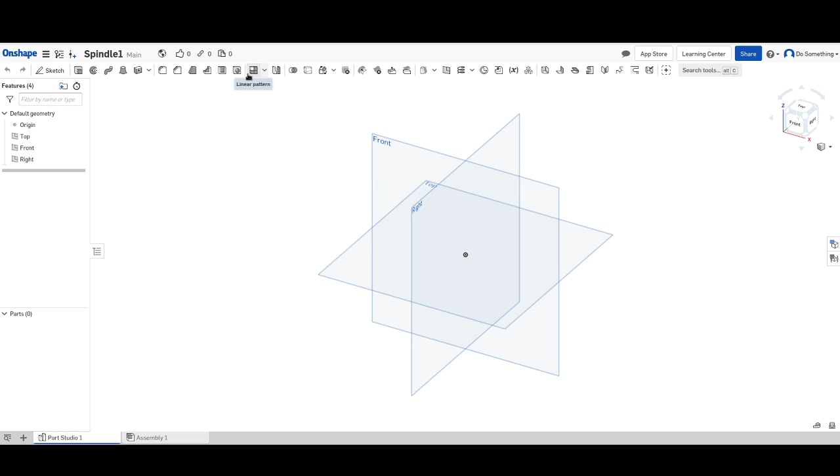Okay, so what I'm doing today is building the spindle for the wires for my curtain robot. I'm doing that in OnShape, which is a free CAD-like tool for designing things that can be 3D printed. OnShape isn't always free, but you can create a free account—the only restriction is that all your designs are public, which is fine since this is on YouTube. I've created a new document and called it Spindle 1. This is going to be a learning experience as we go, since I don't really know how to use this. I had one tutorial from a friend a couple months ago, so we're gonna see how this goes.

So I'm gonna start by making a sketch. Sketch plane will be this plane. Can I hide the axes? How do I hide the axes? I'm sure it can be done. Hide all planes. Boom, okay.

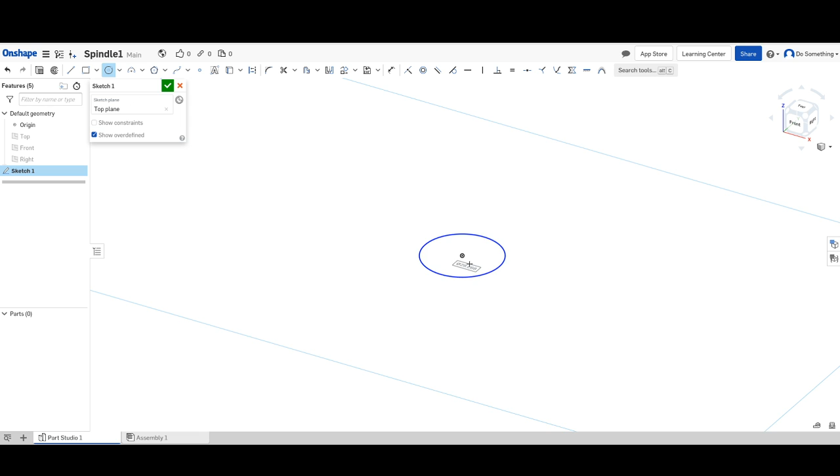All right, so we're going to start by making some concentric circles. Let's double check that our units are correct—workspace units, millimeter. Great. So in sketch 1, I know that the axle, the rod on my stepper motor, has a diameter of 5 millimeters at its roundest point, and it has a cutoff plane where the diameter is 4.5 millimeters. So we're going to start by making, right at the center, a 5 millimeter circle. That's way more than 5 millimeters.

Oops. 5 millimeters. Boom, there it goes, teeny tiny. Okay.

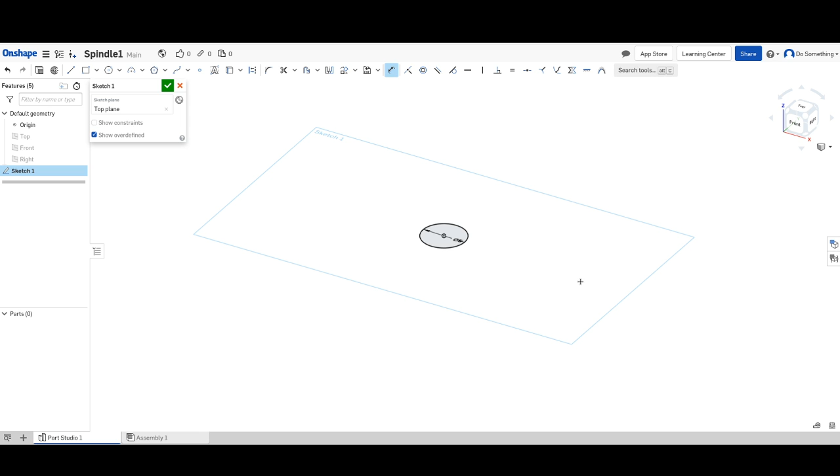Now we're going to make a dot, and stick the dot on the circumference of the circle. We're going to make a straight line, and I'm going to pull that across. OnShape does a bunch of really nice auto fittings, so I know this line is parallel to the diameter of the circle, because OnShape makes sure that it is, which is really nice. I'm gonna make sure the dimension between this guy and this guy is what I want it to be, which is 4.5 millimeters.

All right, so that has created the hole. So far we don't have the hole in anything, but that has created the hole through which the rod of the motor will go.

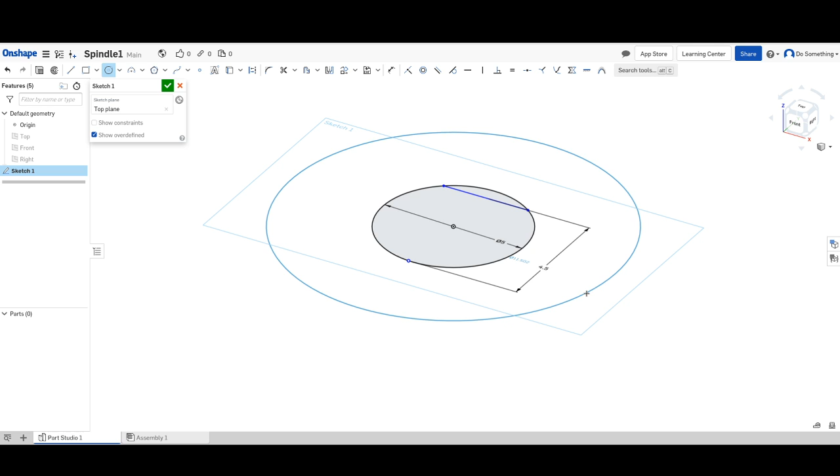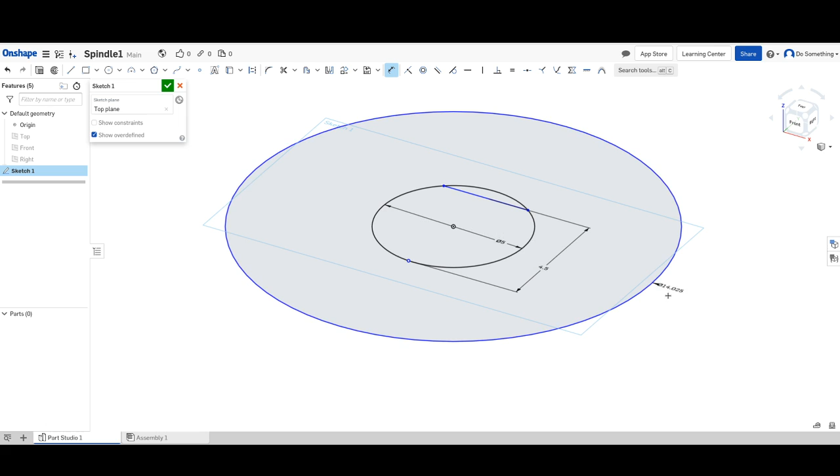Now we're going to create a circle that will be the first kind of boundary of the spindle. I think this is 0.5 centimeter in diameter. So get another—2 centimeters. And maybe just 1.5, so I'm going to make this 15... this diameter is 15 millimeters, sorry.

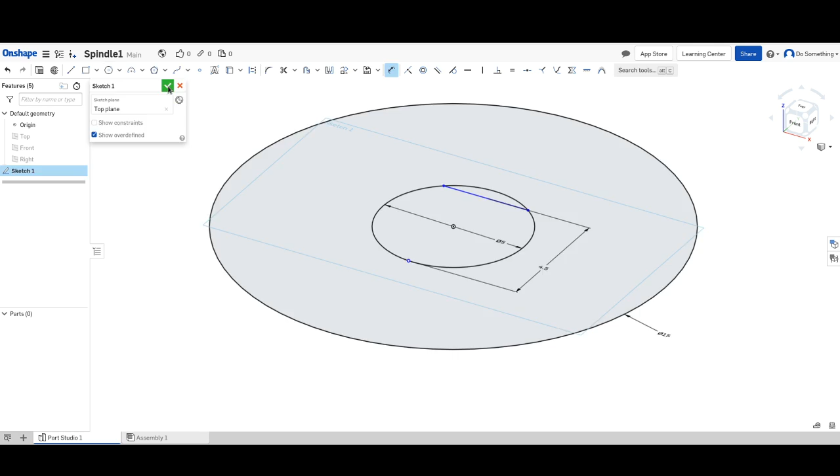All right, now this first plate I want to fill. So I select—okay, this sketch is complete. Now I select the area. Is it just me, or is this not actually a circle? Let's look directly at the top. No, that is a circle. Okay, I'm gonna rotate this back so that we can kind of see. All right, that's a good angle of view.

Okay, so I select that, and I think about how thick I want it. It's just kind of dividing one of the wires from the rest of the world. I want it thick enough that it's not super brittle. I'm gonna say 1.5 millimeters. So extrude that guy—1.5 millimeters.

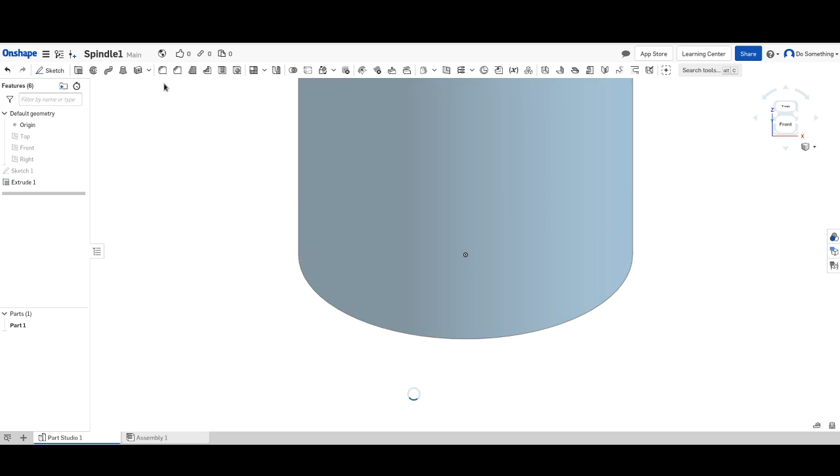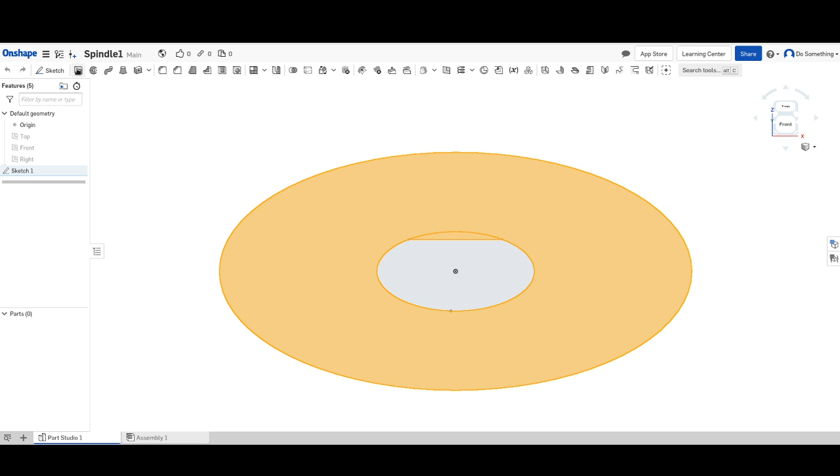Oh, that was not what I wanted. Nope, undo. All right, I forgot that I also need to fill in this little area here so that the hole is not a cylinder—it has this little cutout. So I select... come on, I select in here as well. There we go. Now we extrude, to a depth of 1.5 millimeters.

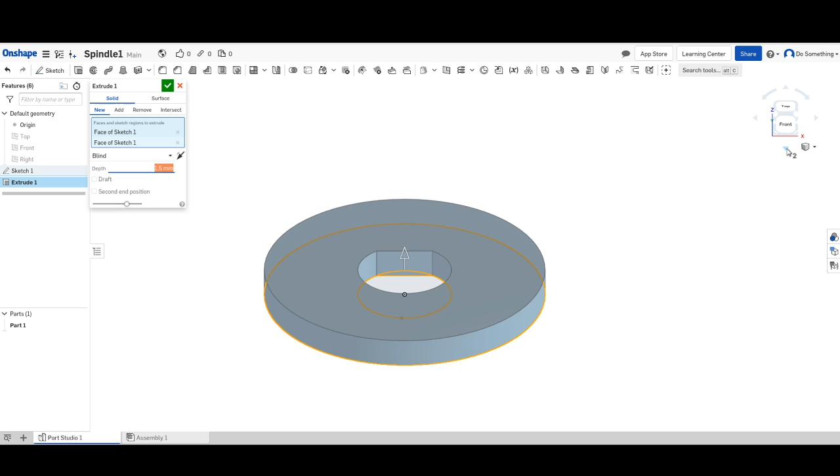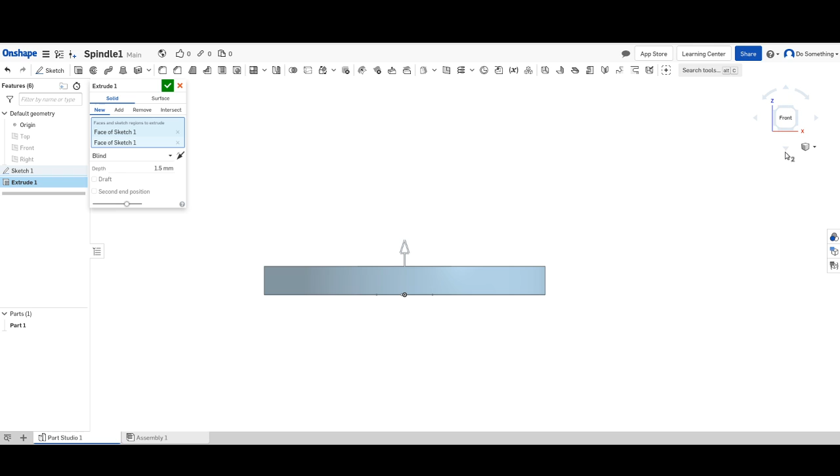Is that going to be wide enough? Let's make it 2 millimeters. 2 millimeters is pretty thick though. Yeah, no, we're making it 1.5. That seems somehow... that still seems almost too thick. One millimeter is probably enough. I mean, you can't know till you try.

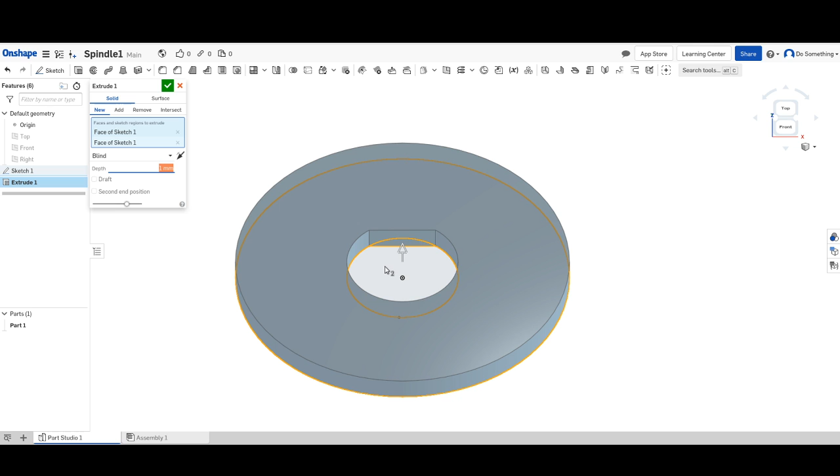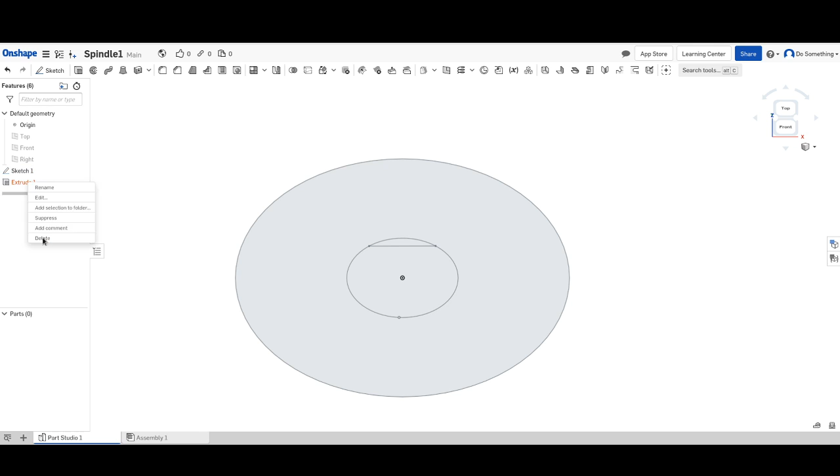Okay, so, oh, you know what I forgot? I forgot to make space for the rod. Yeah, all right, let's go back to sketch 1. That was silly of me. You know what, I'm just going to delete this extrude and—okay, in sketch 1, I forgot a circle. This is the thing. All right, because I need an axle in my spindle in addition to the faces, and all I've made so far are faces and holes.

So we're gonna make another circle. This is going to be concentric with the other two, and it's gonna be 1 centimeter in diameter. So that would make it 2.5 millimeters thick, kind of all around.

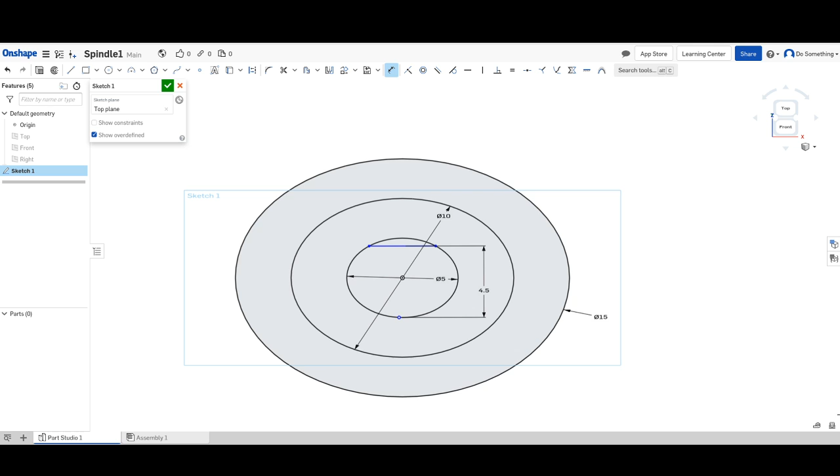I think that's good. Set the dimensions on this guy to be 10 millimeters. I'm going to make this bigger in that case, make this 25 millimeters instead of 15. Nice and big. Okay, now this is going to work.

We're going to make 2 extrusions from this sketch. The first extrusion is going to be of this plate, and it's going to be 1 millimeter thick like we saw. Done with sketch 1.

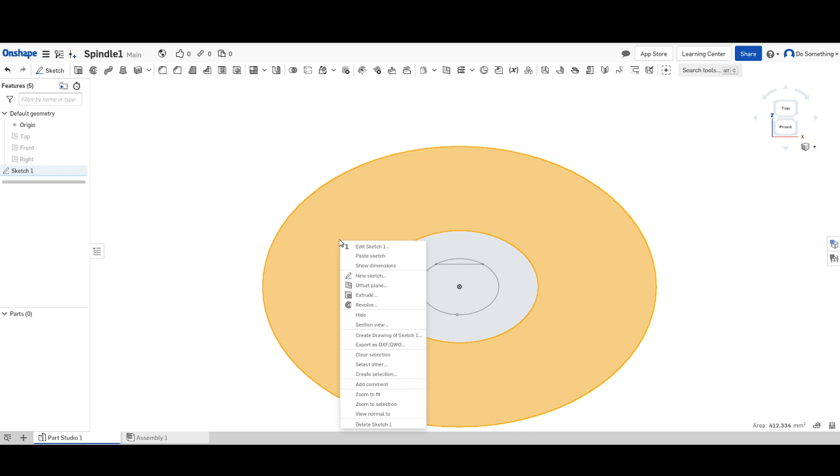This guy, we extrude, we extrude 1 millimeter. Good, okay, cool. Now we're going to make the axle and go back to sketch 1.

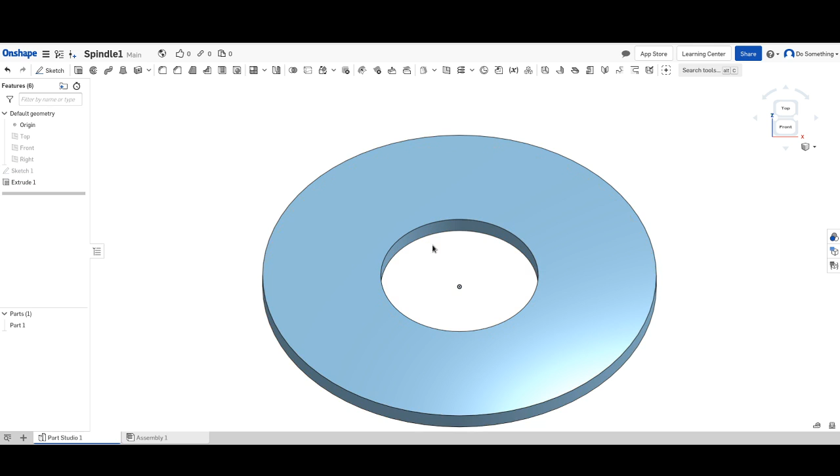The axle, come on, take me back to sketch 1. Show me sketch 1. All right, there we go. The axle.

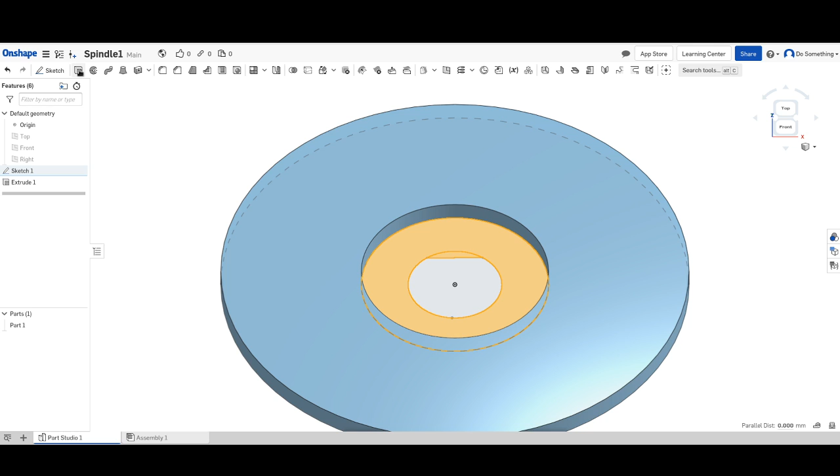Select these guys, that's what we're going to extrude now, and that should be 1 centimeter long, plus the 1 millimeter from here. Is 1 centimeter long enough? Let's make it 15 millimeters, including that 1, so it'll be 14 usable millimeters. I think that'll be plenty.

So this whole thing is going to be like 3 centimeters, a little over 3 centimeters. Yeah, so that's fine. Okay, so we'll make this 15 millimeters. Boom.

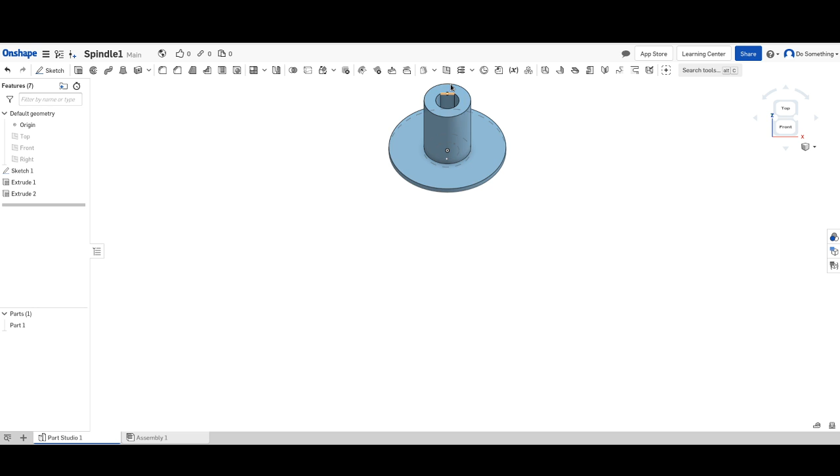All right, so now what we need to do is make... just trying to move this around. There we go. There we go.

So now what we need to do is make a second sketch to make the next plate in the spindle, because this is a 2-section spindle. So I'm going to make another sketch. The sketch plane is going to be the face of extrude 2, and boom, we're done.

And that sketch, can I just copy sketch 1? That would be ideal. Copy sketch entities. Great, sketch 2. Paste sketch entities.

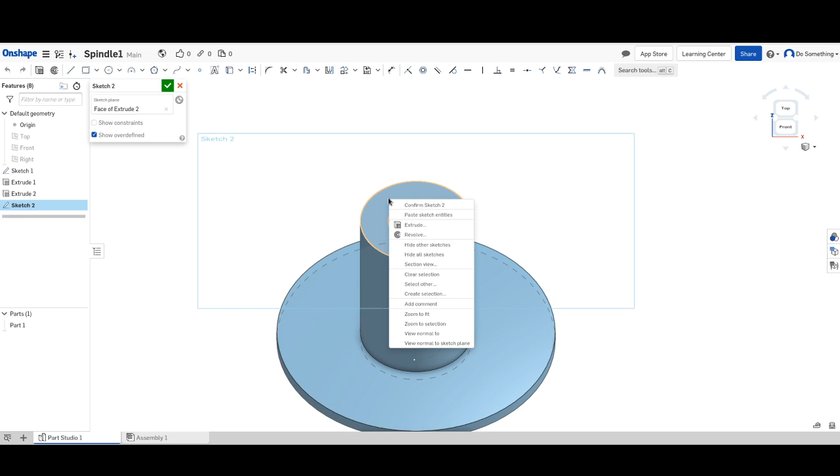I can, but I have to do it piecemeal, and they don't necessarily end up where I want them, but that's okay. All right.

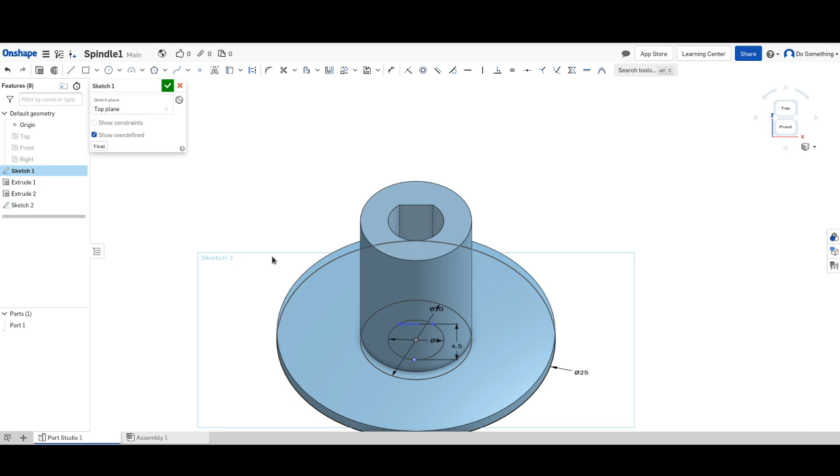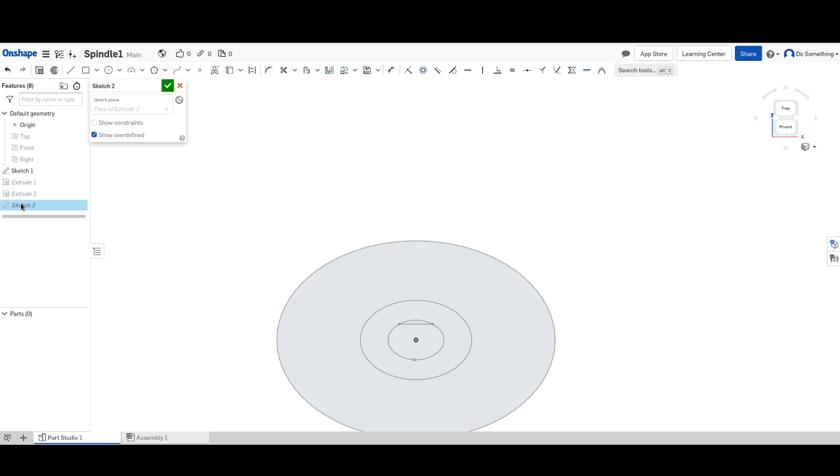So go to sketch 1. Select all the things. Copy sketch entities. Go to sketch 2. Keep forgetting I have to double click. Be concentric. I know there's a way.

Paste sketch entities. Okay, now I would like to be able... no, that's not what I want. I would like to be able to put these where I want them, to drag.

Is there a revolve? These are all things I can make. Transform. I don't want that. Transform is what I want. Drag the manipulator to move.

Alright, so I should be able to drag. Why does it keep trying to be a select? I don't want that. Oh, this is gonna be crazy. This is gonna make me crazy. Okay.

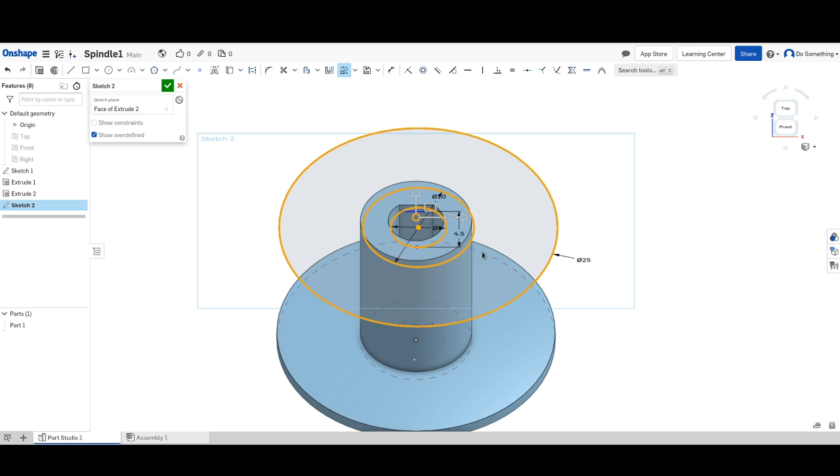Select all the things. Not that guy though. Why is that guy selected? Alright. Did that work? It did not work. Undo.

Alright, you know what? Screw it. It's going to be faster to remake these. That I can do.

Thing one, make a circle. Gonna view a little more head on. Cool, here's my dot. Make a circle. Make it 5 millimeters.

Wait, those are not... go back to sketch one. These are not perfectly aligned to each other. Oh, son of a... crap. Alright, you know what? We're gonna scrap the whole thing. We're gonna start over.

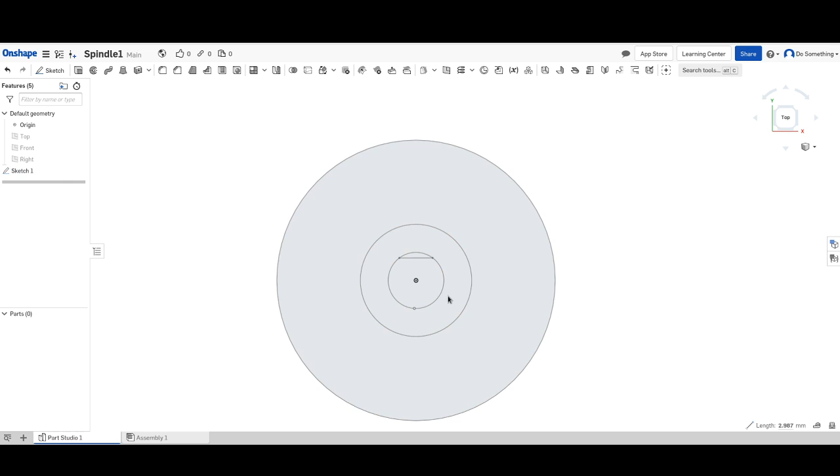Alright, so the circles are fine. It's really just these guys that are not fine. Wait, nope, didn't want that. Can I delete just one element? I don't want to delete sketch one. I want to edit sketch one.

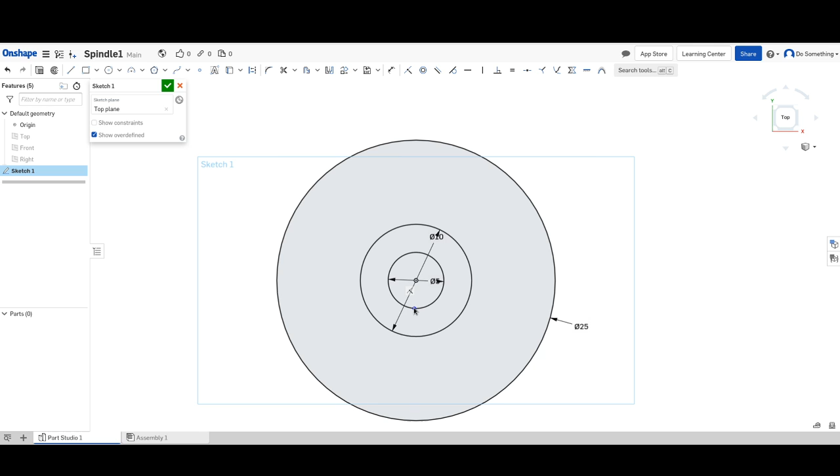There we go. Okay, delete that guy. Delete that guy. And delete that guy. Yes, please, delete that guy.

Delete that guy. Okay, just gonna move these labels so that they're a little... oh, come on, swear to God. Move these labels so they're a little out of my way. Alright, now let's do this again.

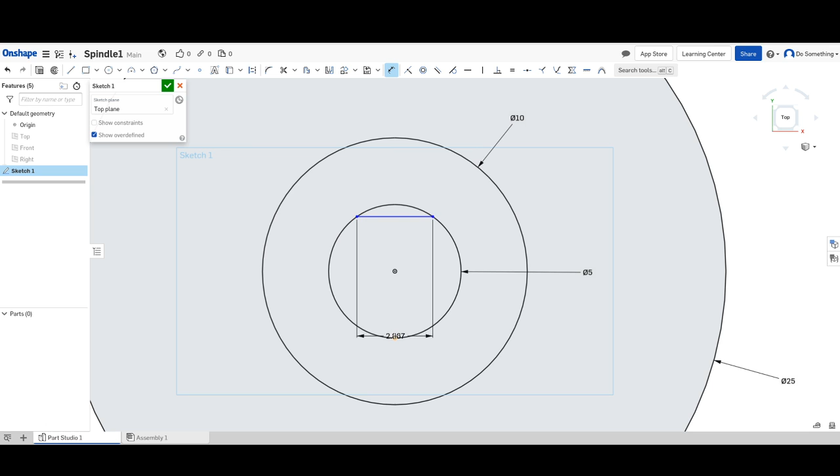Create a dot. There we go. Create a line. ...dimension that I care about.

Is this now what I think it is? Like if I draw a straight line from here through the center, does it in fact bisect this guy?

That's 1.5 exactly. And that's also 1.5 exactly. Okay, yes. So...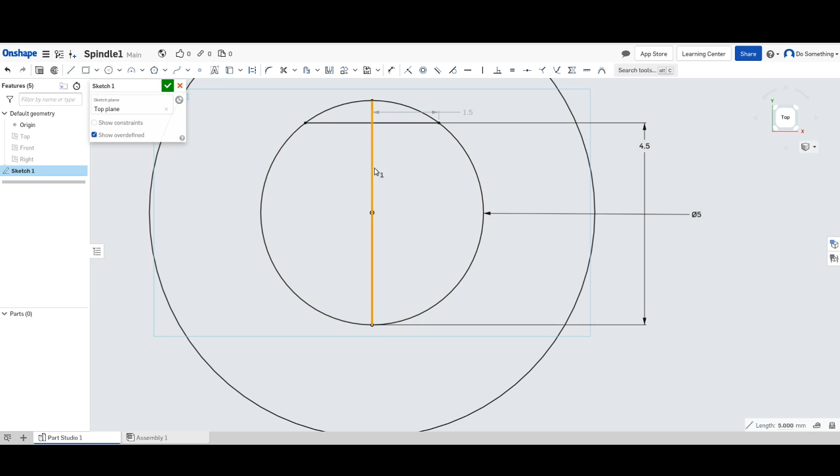This guy I don't want. Get. All right, cool.

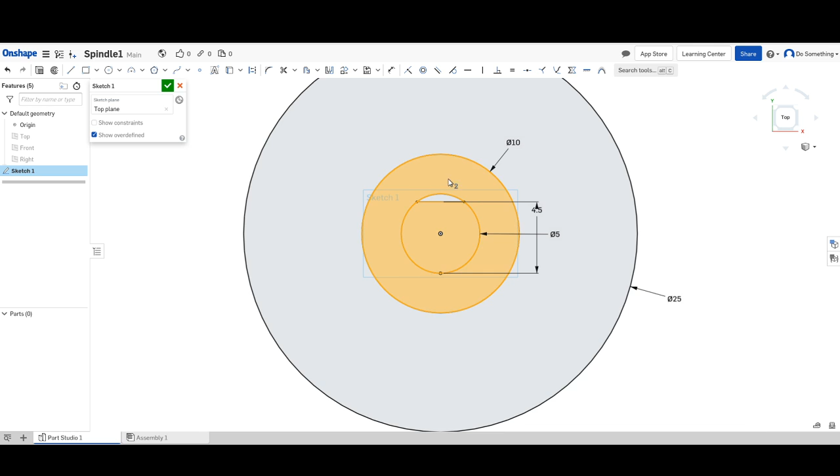Now we're doing better. All right, so now thing one, that's the hole, that's the axis, and that's the plate. All right.

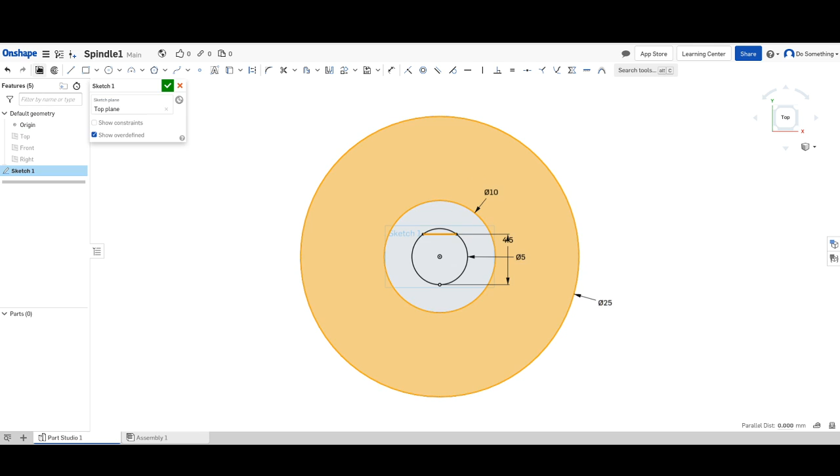All right, let's extrude the plate. We're talking 1 millimeter thick. I'm gonna hedge that a little bit. Extrude the spindle.

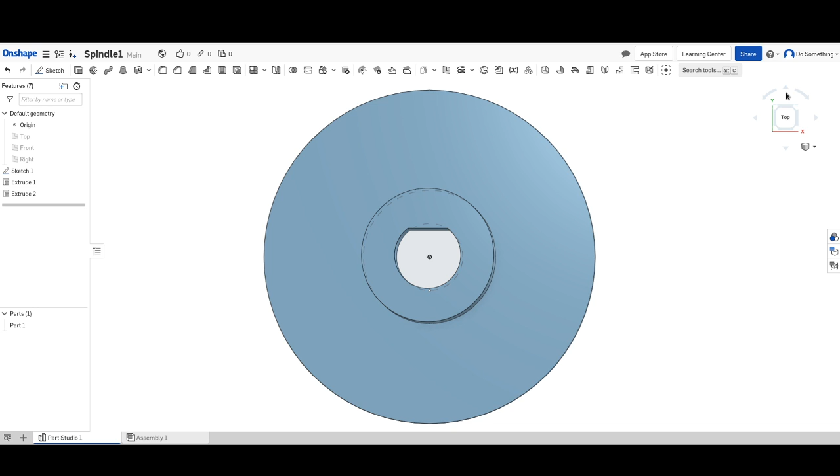Okay. All right, good, good, good.

Okay, we're gonna make sketch 2. Sketch 2 is just a copy of sketch 1. If I can just make sketch 2...

Neat. Oh, I see. What is going on here? No, I don't. What just happened?

I don't know what those arrows are. Oh, it did move it. Oh, okay. Transform.

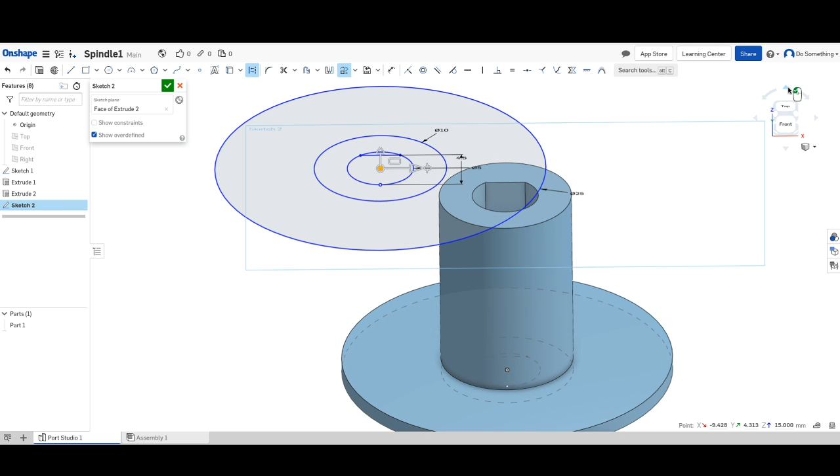I don't know what that does. That's so weird. Nope, let's look at the top. Let's just look at it head on. The other dimensions are not necessary and are just confusing.

I genuinely don't understand what any of this is about. I moved something, something moved. What the... you know what? Never mind.

I don't know what that eye is. I don't know what anything is. You know what? It will be faster to remake all the pieces.

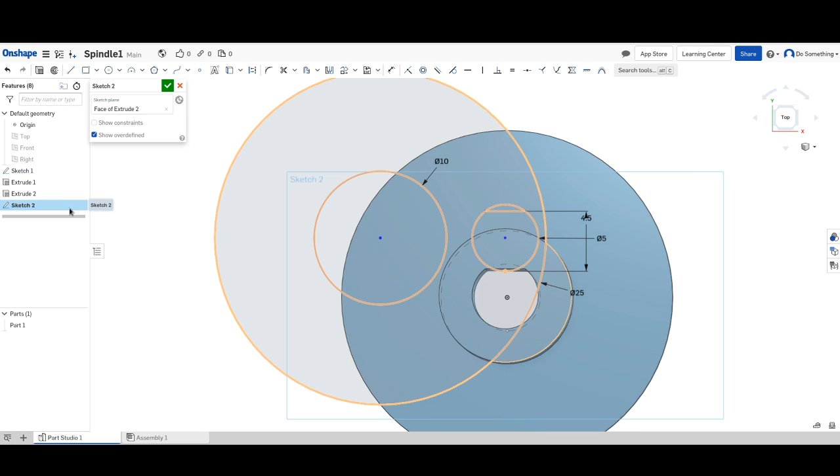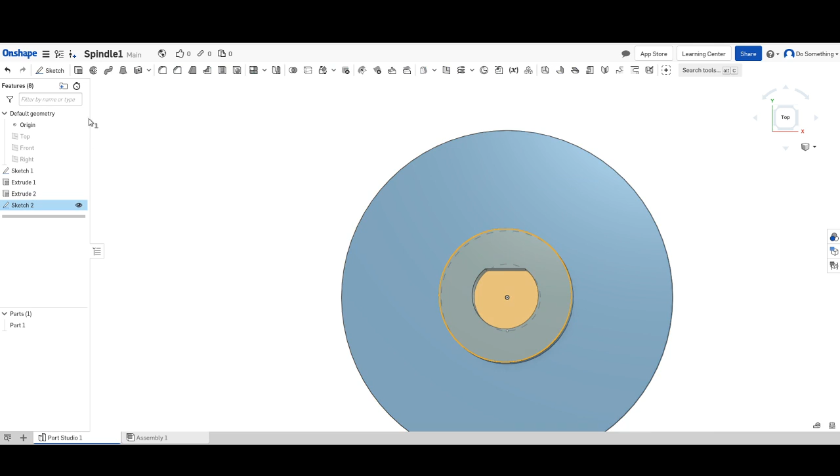All right, we're gonna make a sketch. You go away. Sketch plane. Face of extrude 2. Yes, please. In the sketch, let's make a circle. Let's make it...

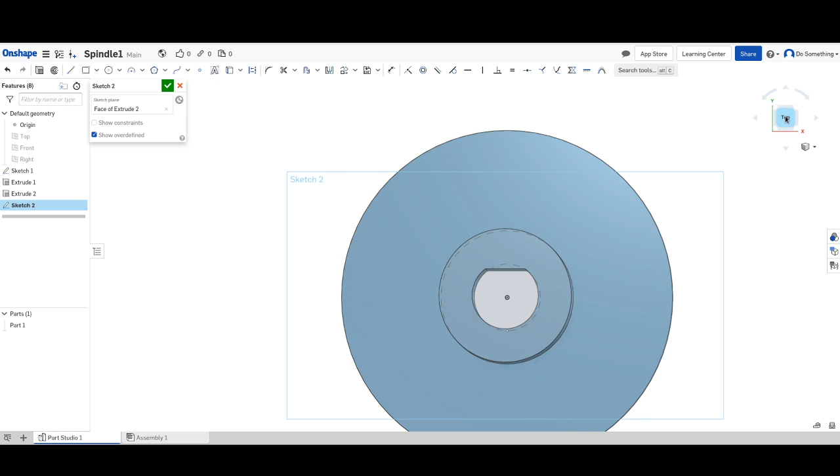It's not actually concentric with the other circle. Nope. Try again. So here we are, head on top. Okay. Circle.

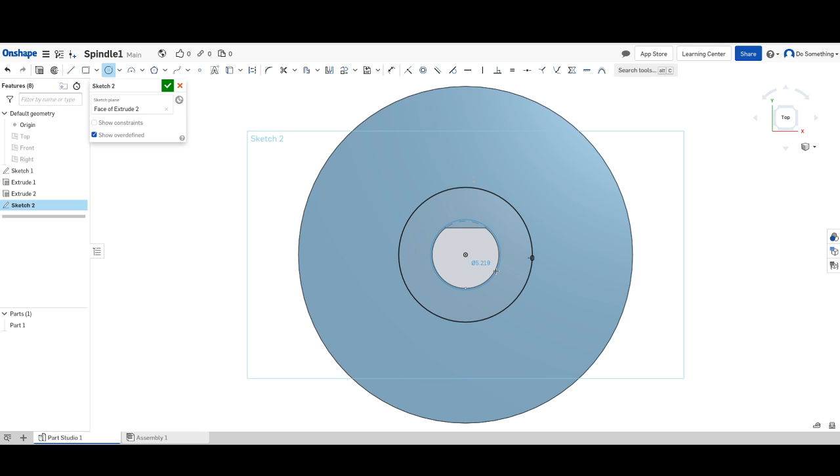Nice, okay. Second circle, make it 5. Make it a little bigger than 5 because that'll make it easier to select, and then I won't have to deal with that weird whatever just happened with the last one.

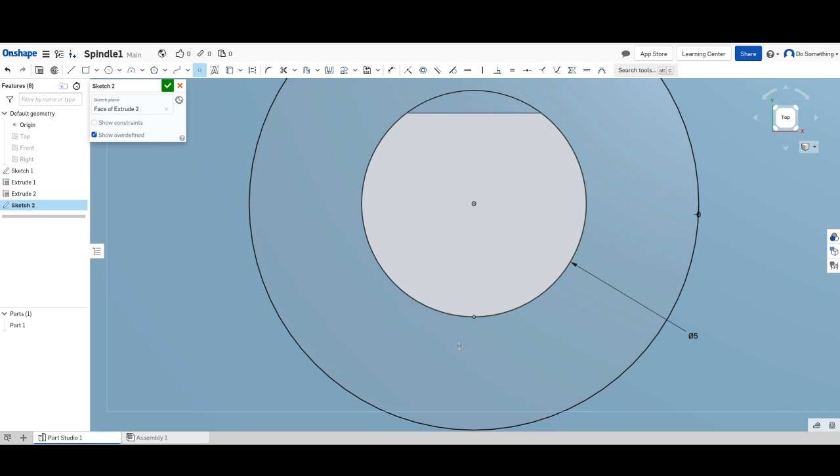All right. Dot. Line. Dimension this guy, and this guy.

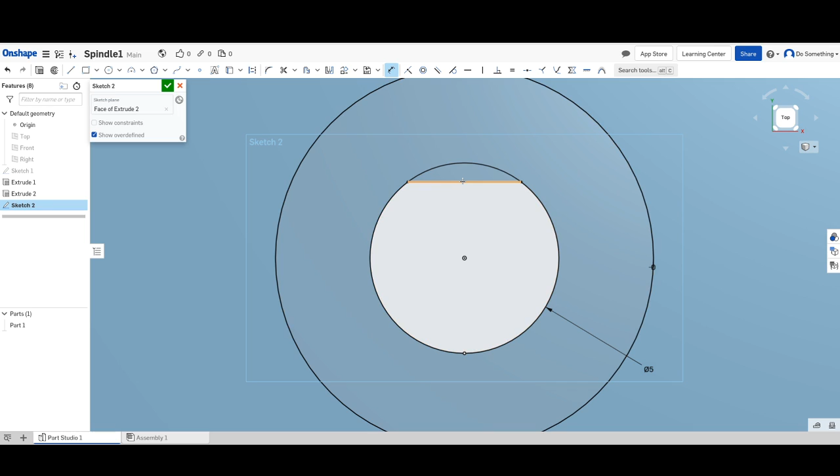Hide sketch 1, that's going to make this easier. Dimension this guy, and this guy. Dimension this guy, and this guy, and it's exactly 4.5.

Booyah, Kasha. Nice, all right. And the last circle.

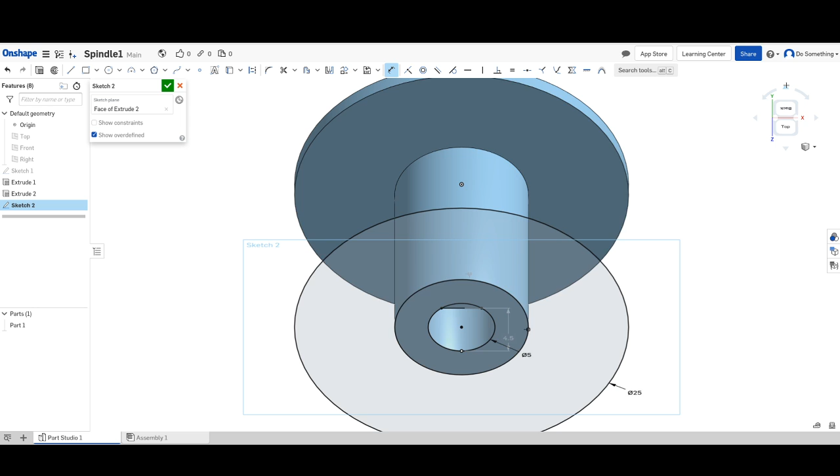25. Boom, all right. Now if we look at this a bit, oh whoops, wrong way. There we go. We've got an identical sketch to sketch 1, sitting on top of that face. All right, so we're gonna do basically the same extrusion.

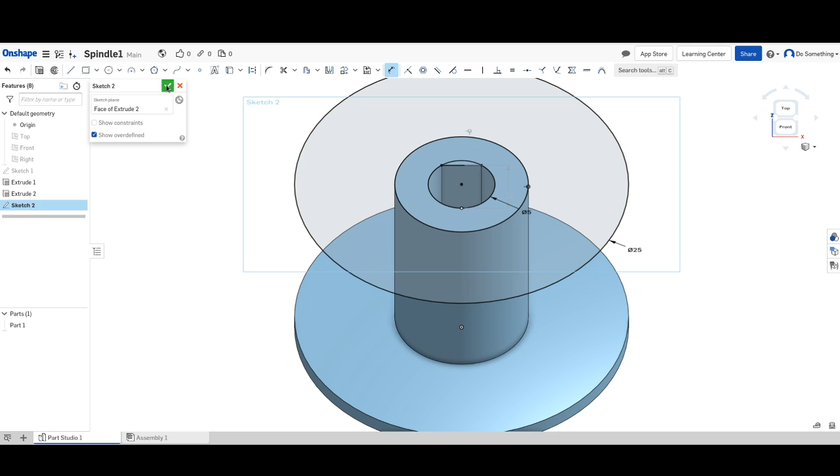We're gonna do, oh, save sketch 2, I always forget about that. All right, we're gonna do the divider. We're gonna extrude that to 1.1 millimeters again.

And then the, oh, what's going on here? Oh. Okay, cancel that, screwed that up somehow. All right, the divider, extrude to 1.1 millimeters and save the extrude. That's the thing I always forget to do.

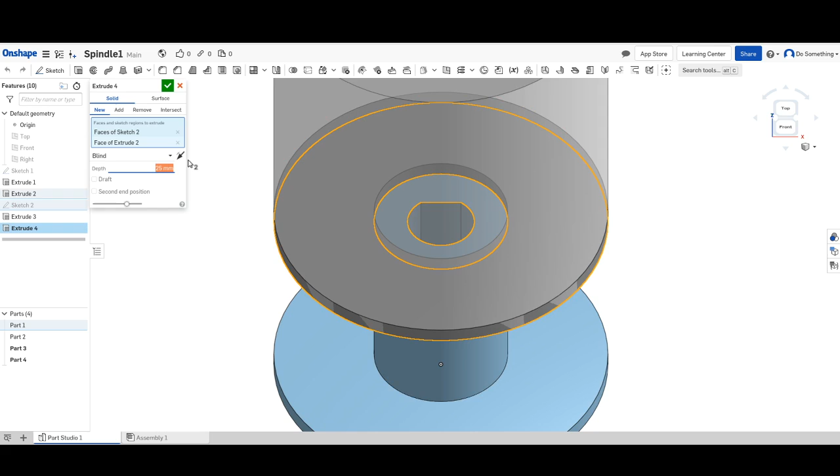And then in sketch 2, extrude that middle bit, make it again 1.5 centimeters, that's 1.5 millimeters, 1.5 centimeters. Oh yeah, no, that's not what we want.

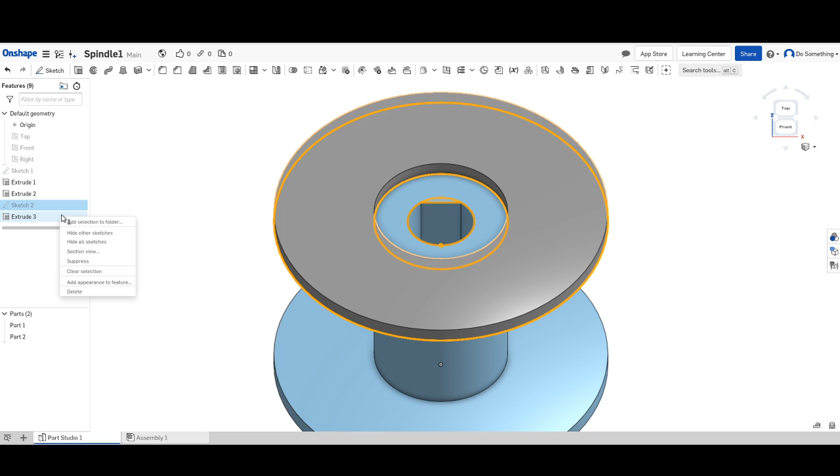Go to sketch 2. Select, for now, suppress that. Oh, I don't want to suppress sketch 2. Unsuppress sketch 2. All right, there we go. All right.

There we go, all right. Select that part of sketch 2, extrude that to 15 millimeters. Good. Unsuppress extrude 3. Cool, now we got all our bits.

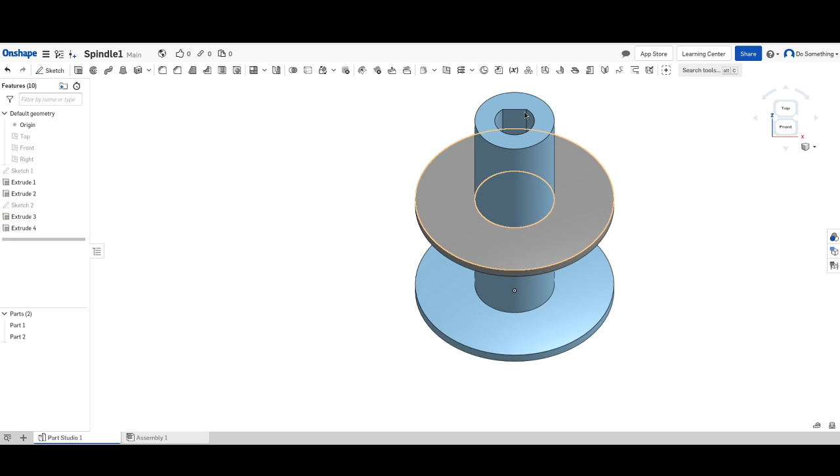All right, so we're going to make our final sketch, and that's just going to be a plate that goes on top. We're going to cover everything with... do I want to cover it? I don't want to cover it. I'm not going to cover it. Okay.

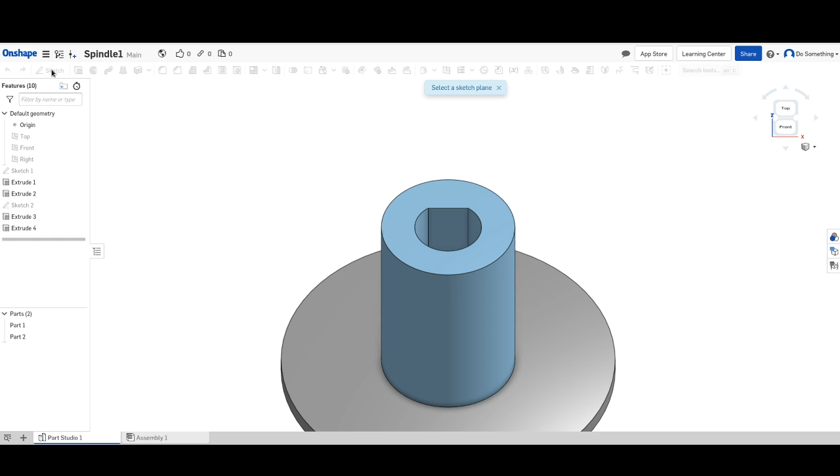Make another sketch. Select a plane for the sketch. Make 3 circles for my sketch. Circle the first. Dimension 5 millimeters.

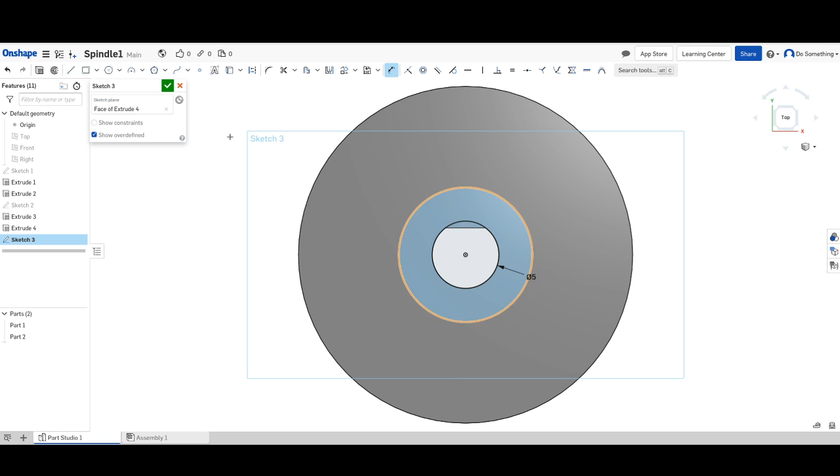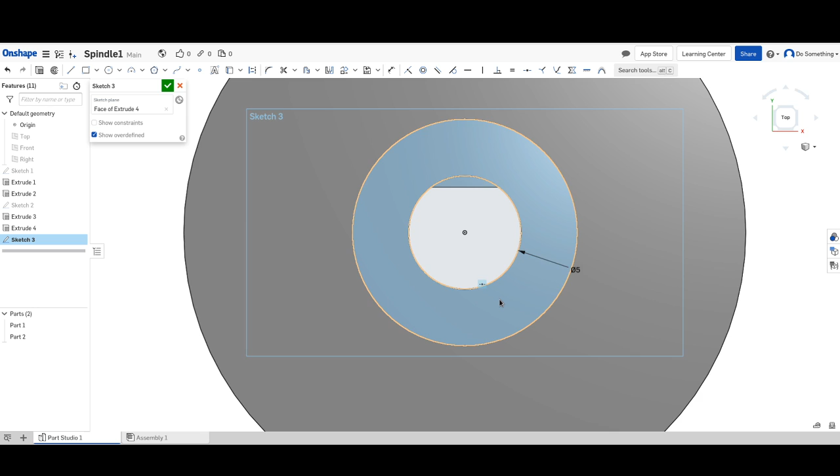Dot the first, straight down. Straight down, dot the first, straight down from the center. No, that's not what I wanted. Dot the first.

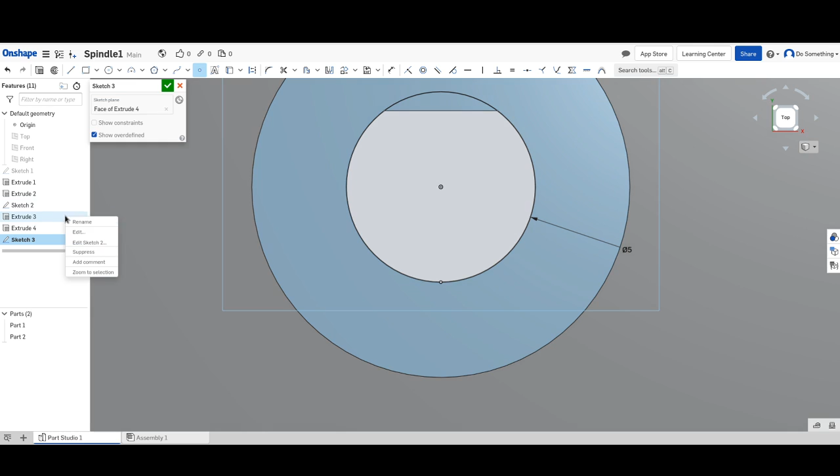Show sketch 2, are those dots in the same place? What is going on here? Oh, it didn't regenerate because it's missing. I see, all right.

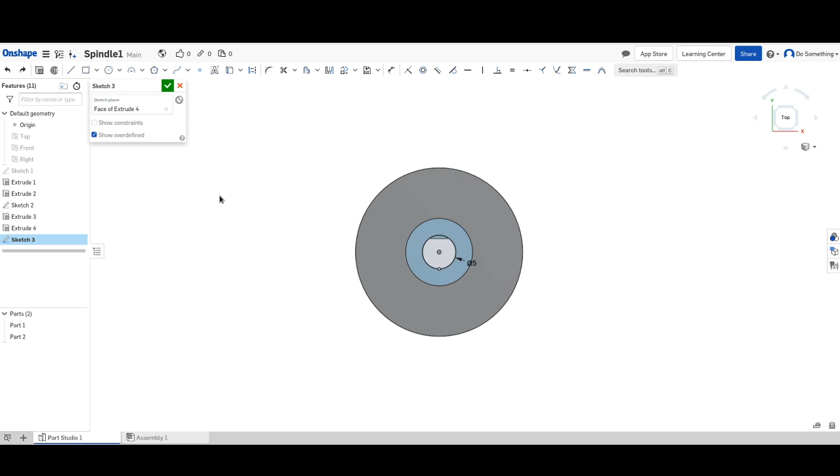Extrude 2. Okay, I have to undo a bunch of stuff. All right. Not, that dot is just not where I think I want it. I don't know why this isn't working. Oh, it's gonna make me crazy. All right.

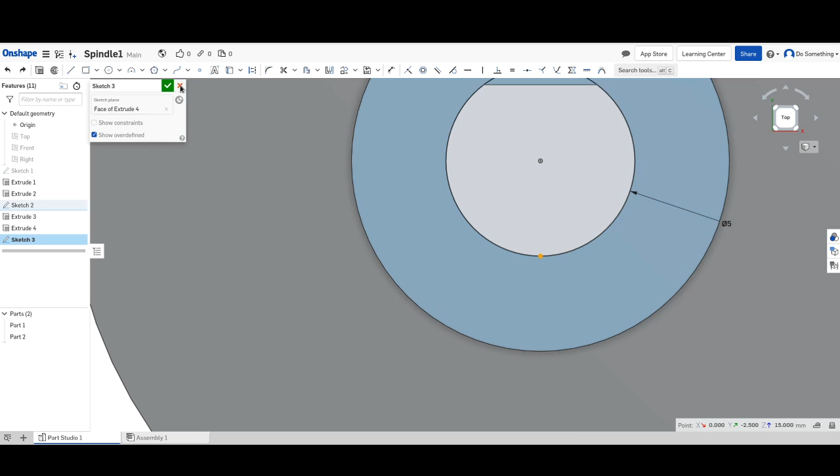Just gonna start sketch 3 over. Okay, yes, I heard you. No, cancel sketch 3. Sketch 3, face of extrude 4. All right.

Circle 1 with its diameter of 5 millimeters. Dot 1.

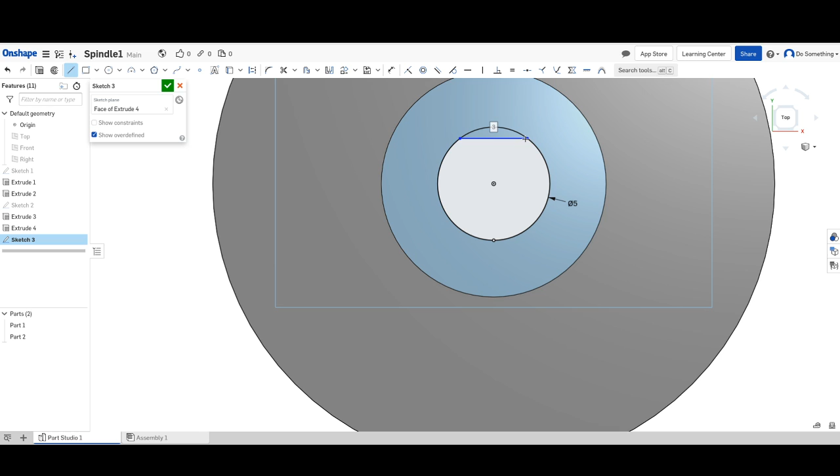Exactly 3, that's a good sign. That's exactly 4.5. That's a good sign. It still doesn't feel like this is directly down from here. It feels offset. I'll find out when I extrude it.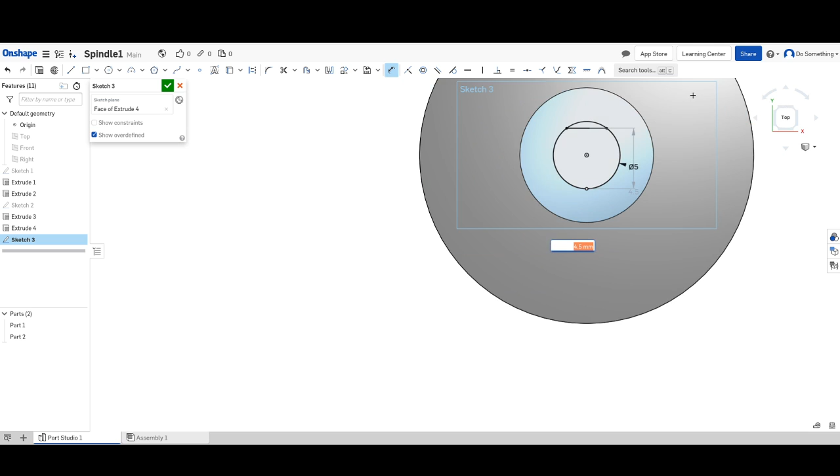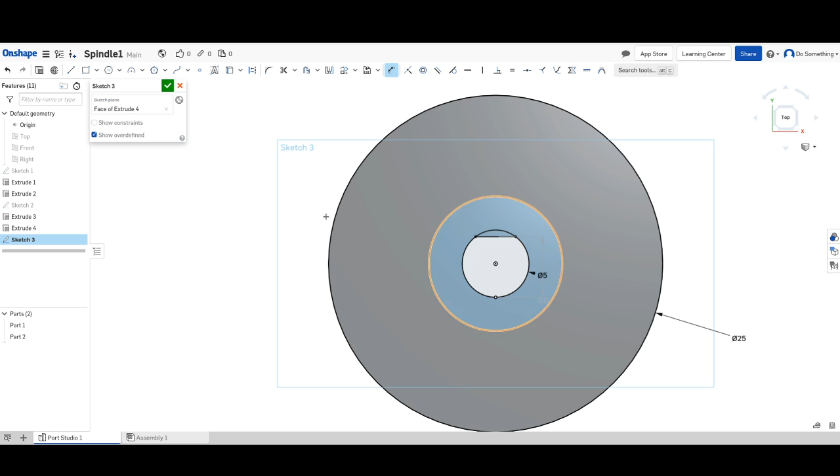Okay, and the final circle. D. 25 millimeters. Okay. We did it. Did it, friends. Unselect that guy.

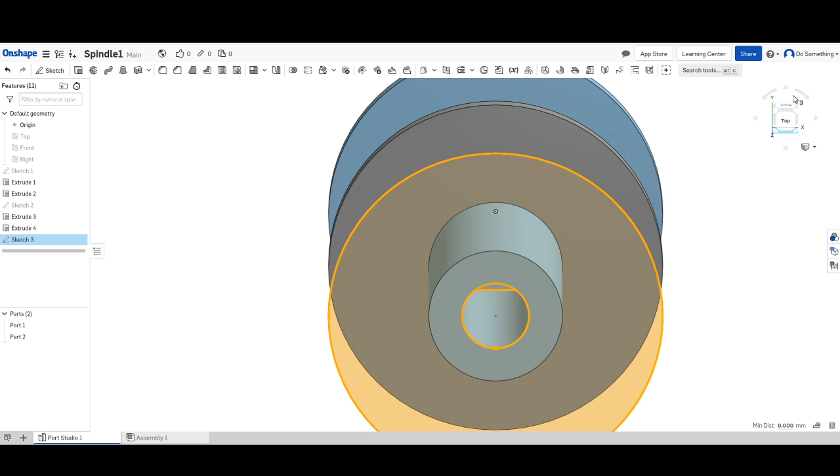Go to sketch 3. Select. Nope, wrong way. All right.

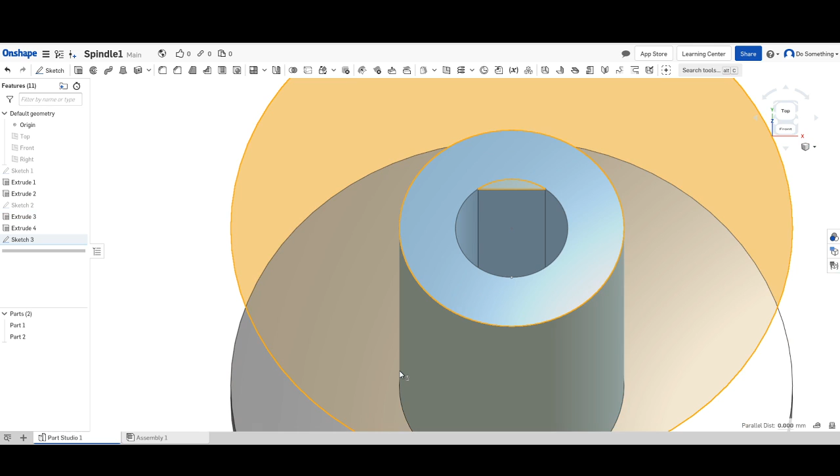What does sketch 3 by itself look like? I don't understand. Wrong way.

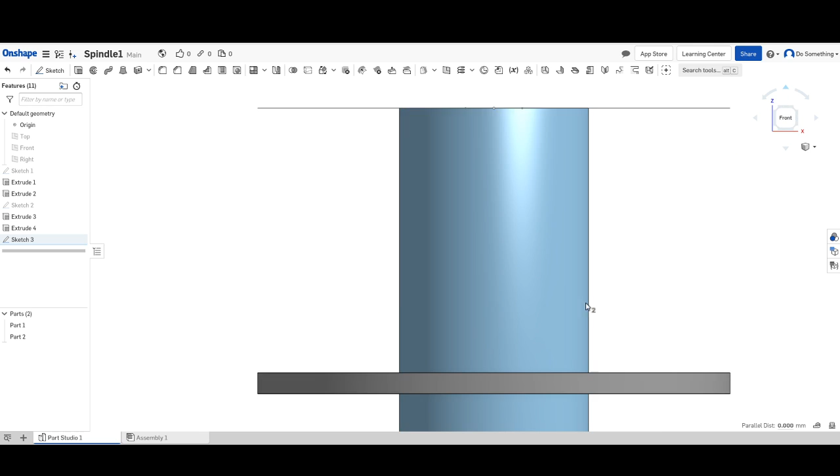Oh, that's a separate part. It's a separate part because of struts. That's okay, it can print with struts. That's fine.

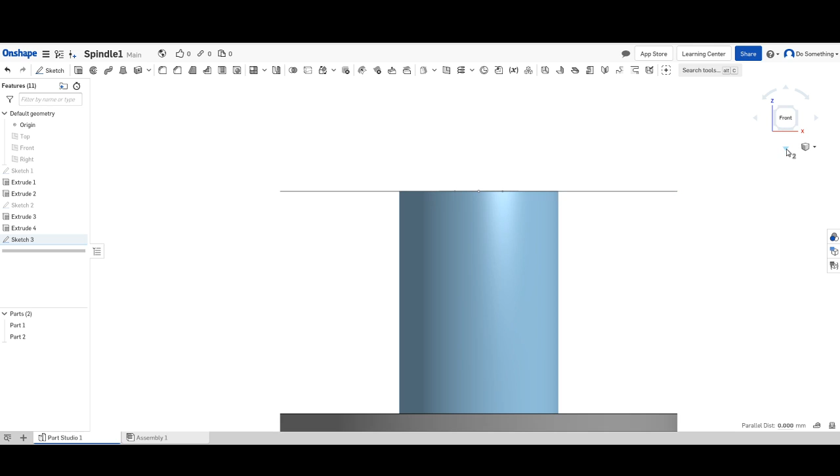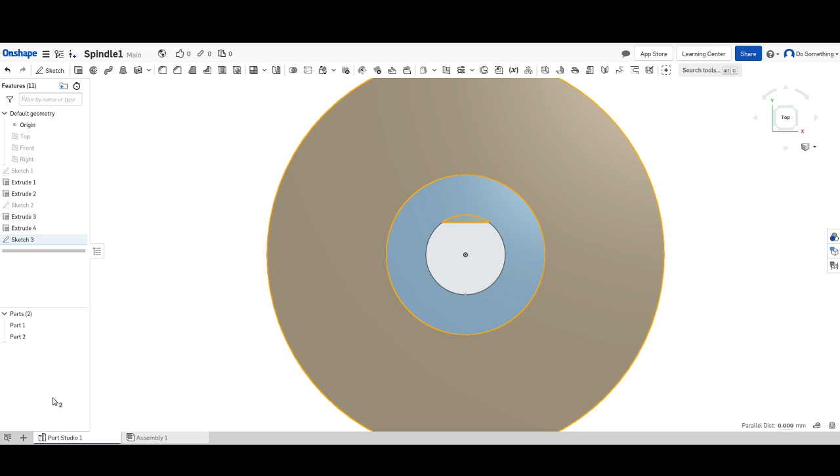This circle does not exist in this sketch, or at least it shouldn't. What are the elements of this sketch? All right, there we go. That's all the pieces. That guy shouldn't be there, but it doesn't matter.

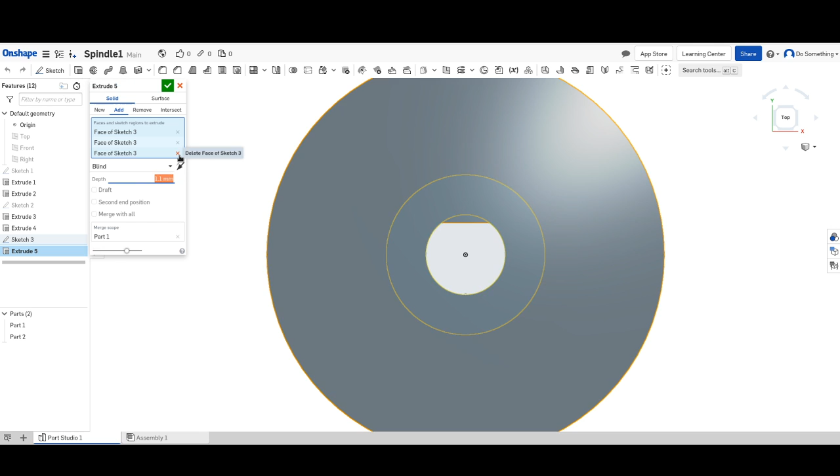I'm going to extrude all these pieces, .1 millimeters. There we go.

That's the piece, that's the spindle. So the question is, do I want to print it with struts in this empty space here, or do I want to print 2 pieces?

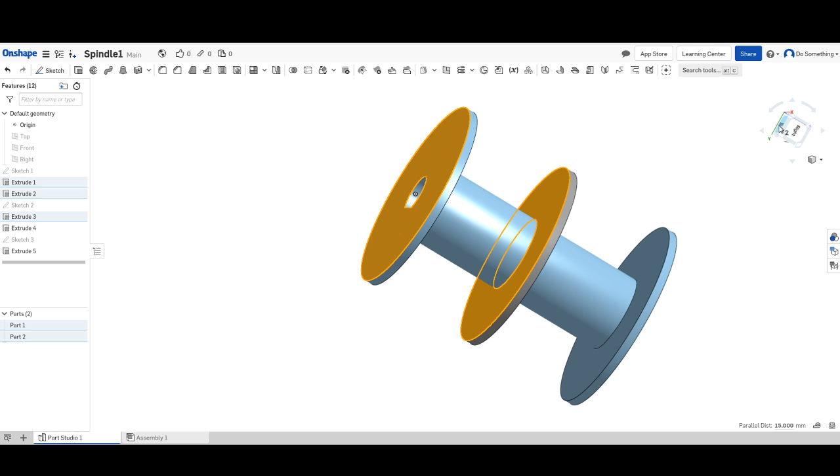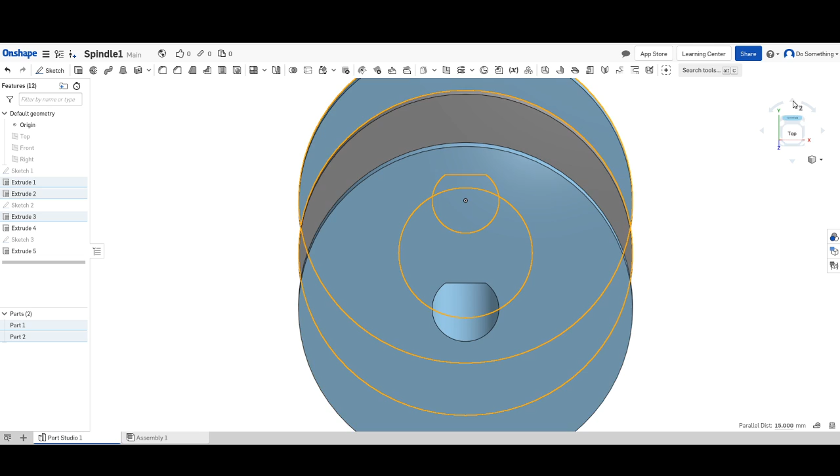Why is this a second part, but this is not? That actually I think is a really important question, and I don't understand. Well, I will find that out. Different, then I will find out.

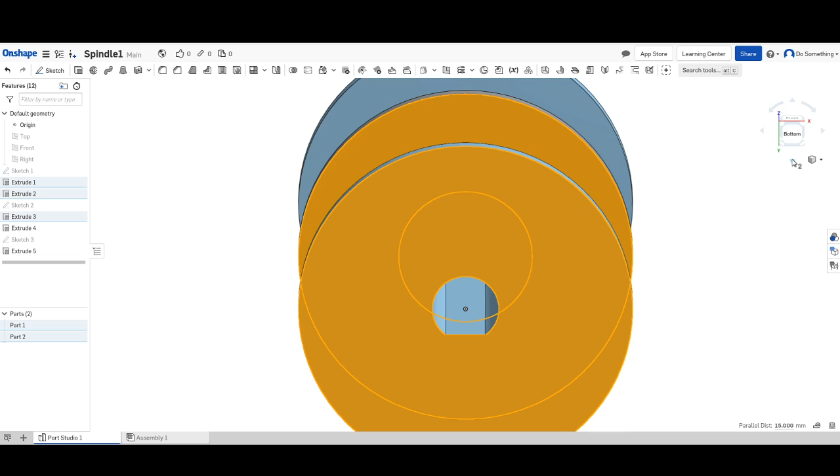What does she look like from the bottom? That is exactly what I want. I'm pretty happy, all right. This is pretty cool, that's my spindle. We did it, guys.